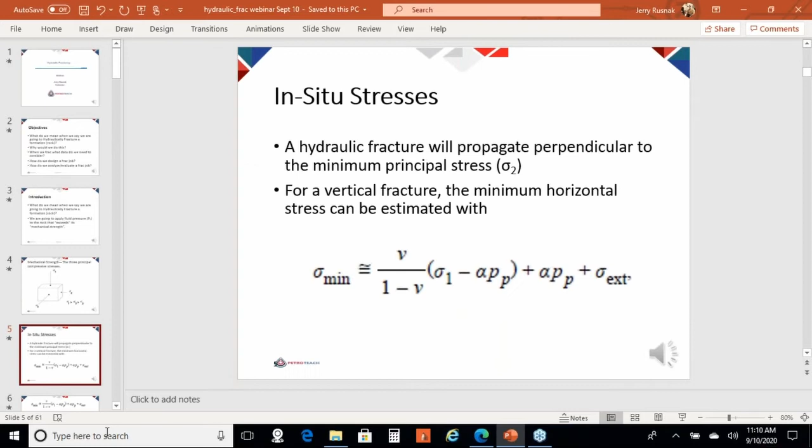Not sure what, can you hear me now? Yes, yes, now it's okay. Please start from your first slide because the audience couldn't hear you. Okay, let me go back. Let me figure out how to go back here. Let me get out of this. I can't, hang on just a second.

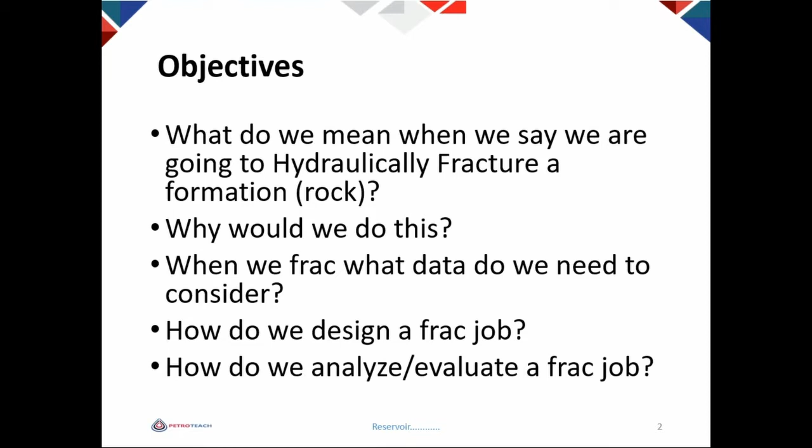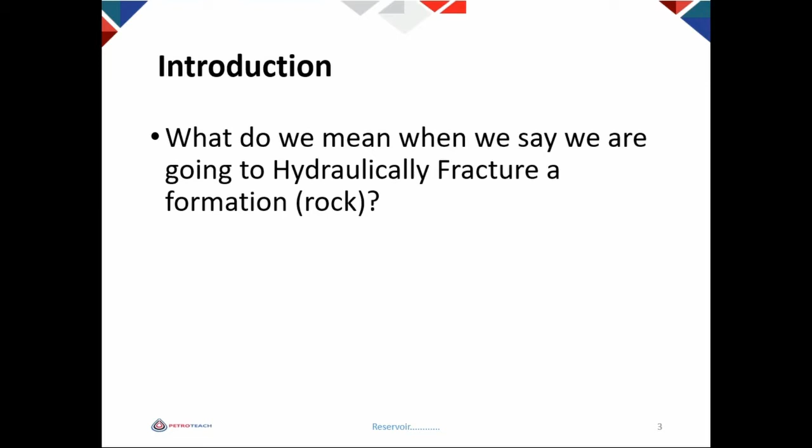So to start out, let's answer the question: what do we mean when we say we are going to hydraulically fracture a formation or a rock? We mean we are going to apply fluid pressure to the rock that exceeds its mechanical strength.

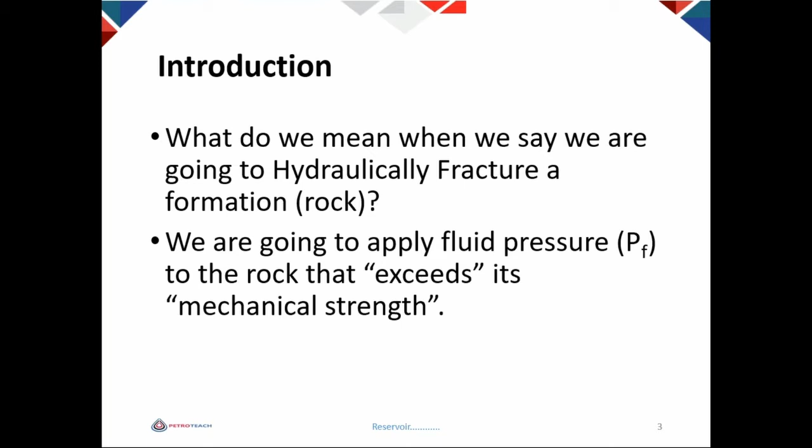When we look at the mechanical strength of a rock, we usually look at the three principal compressive stresses: sigma 1, sigma 3, and sigma 2. Sigma 1, we usually call the overburden or vertical stress, and it is normally the largest stress. Sigma 3 and sigma 2 are the resulting horizontal compressive stresses, where sigma 3 would be the maximum horizontal compressive stress, and sigma 2 would be the minimum horizontal compressive stress. So sigma 1 is larger than sigma 3, which is larger than sigma 2.

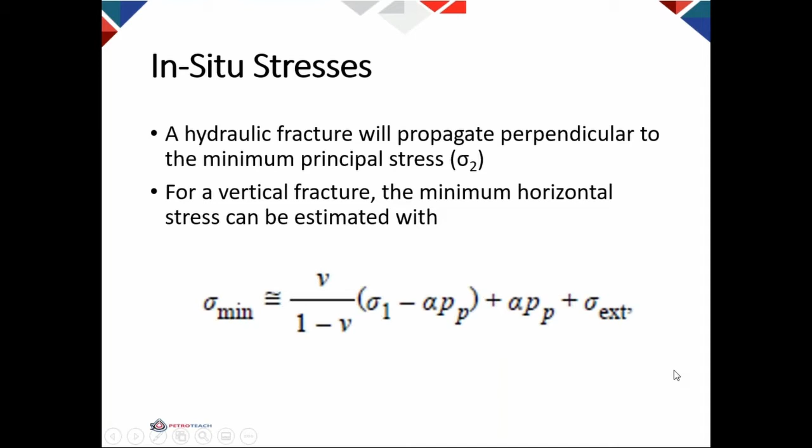Now, if we look a little closer at these in situ or local stresses, we know from experience that a hydraulic fracture will propagate perpendicular to the minimum principal stress, which was sigma 2 in the previous diagram. And for a vertical fracture, the minimum horizontal stress can be estimated with this formula: the minimum horizontal stress is approximately equal to Poisson's ratio divided by 1 minus Poisson's ratio times the quantity sigma 1, which is the overburden pressure, minus Biot's ratio, alpha, times the pore pressure, plus Biot's ratio times the pore pressure, plus sigma external, which accounts for any external stresses, for instance, tectonic stresses.

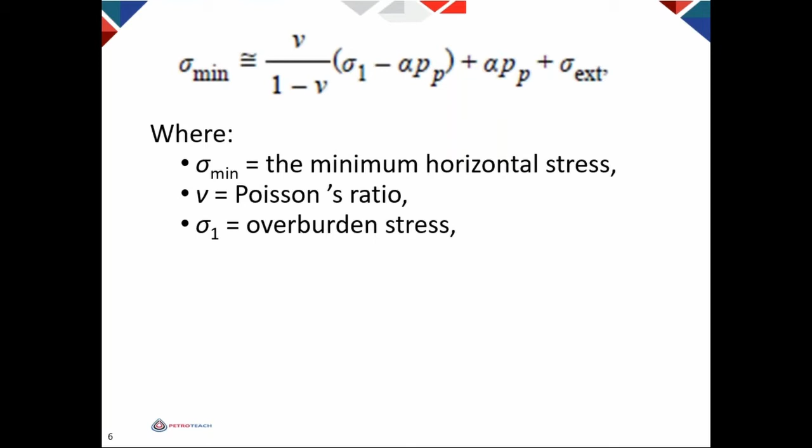So what else can we learn from the formula? Sigma min is our minimum horizontal stress. Nu is Poisson's ratio, and we can tell by looking at the formula that the larger Poisson's ratio is, the higher will be the minimum stress. Sigma 1 is the overburden stress, and again, the larger the overburden stress, which often means the deeper the well, the higher the minimum stress.

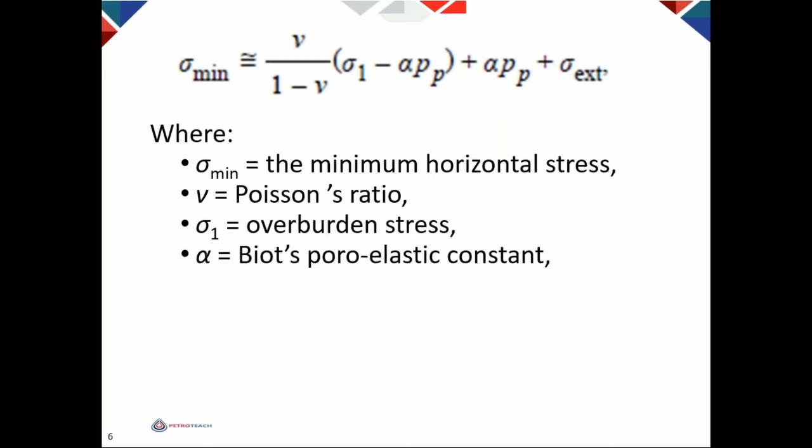Alpha is Biot's poroelastic constant, and it is tied in with the pore pressure, but in general, as the Biot's poroelastic constant increases, the minimum stress increases. Again, the reservoir fluid pressure or pore pressure tied in with Biot's constant shows that the higher the pore pressure or reservoir pressure, the higher the minimum stress. And if we have any external or tectonic stresses, they will again add to and increase the minimum stress.

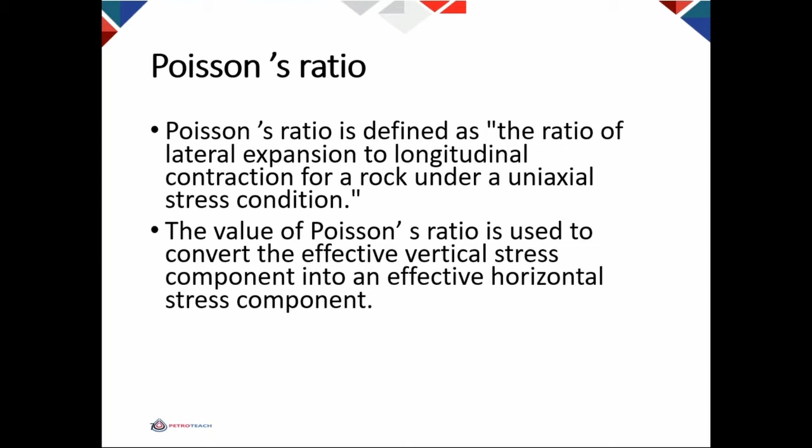So let's look at some of these variables. Let's start with Poisson's ratio. Poisson's ratio is defined as the ratio of lateral expansion to longitudinal contraction for a porous rock under uniaxial stress conditions. The value of Poisson's ratio is used to convert the effective vertical stress or overburden stress component into an effective horizontal stress component.

This value ranges from 0.15 to 0.35 for a sandstone and 0.28 to 0.43 for a shale, which, going back to our formula, would tell us that in general, the minimum horizontal stress for a sandstone is going to be less than that for a shale.

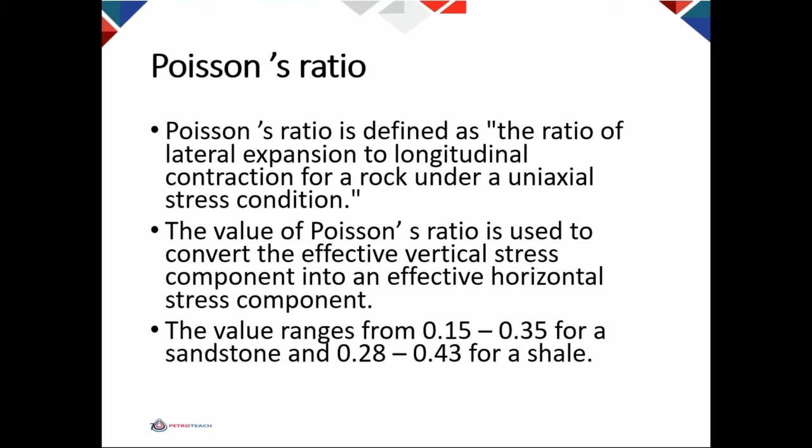Now let's look at Biot's poroelastic constant. It's defined as the ratio of the volume change of the fluid-filled porosity to the volume change of the rock when the fluid is free to move out of the rock. It ranges between 0 for a solid rock without any porosity and 1 for an extremely compliant and porous rock.

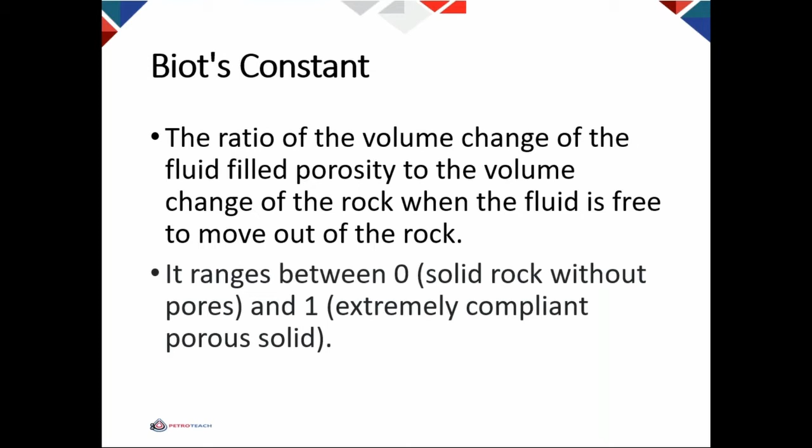Another modulus that we use when analyzing the mechanical strengths of rocks is Young's modulus. Young's modulus is defined as the ratio of stress to strain for uniaxial stress. This modulus of a material is a measure of the stiffness of the material. If the modulus is large, the material is stiff.

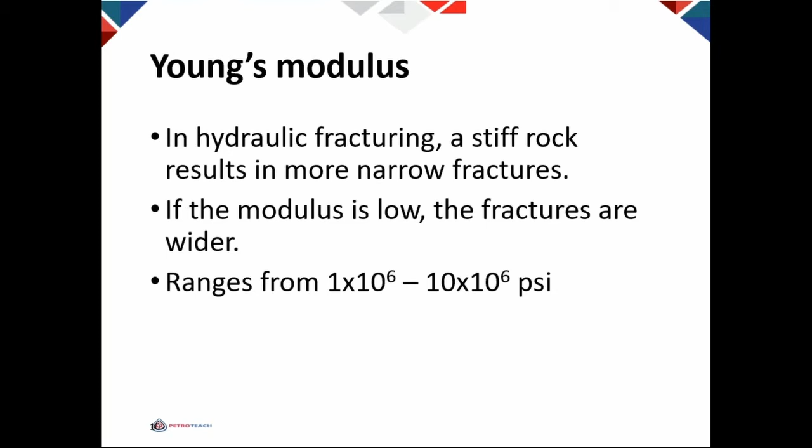In hydraulic fracturing, a stiff rock results in more narrow fractures. On the other hand, if the modulus is low, the fractures are wider, and the rock is more elastic. The ranges of Young's modulus for rocks ranges from 1 million to 10 million psi. Just for a reference, Young's modulus of steel is around 30 million psi.

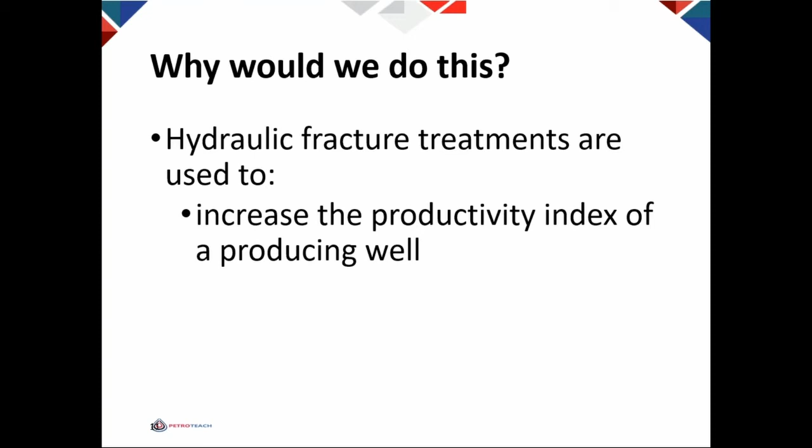So we've talked about what happens when we hydraulically fracture a rock and how the properties of the rock affect this. Now let's talk about why would we do this. Why would we hydraulically fracture a rock? Hydraulic fracture treatments are used to increase the productivity index in a producing well or the injectivity index of an injection well.

So what is the productivity index? Well, we commonly refer to it as J, and it's a measure of the flow rate we will get from the well depending upon the pressure drawdown we put on the well. So the productivity index is measured in stock tank barrels per day per PSI of drawdown.

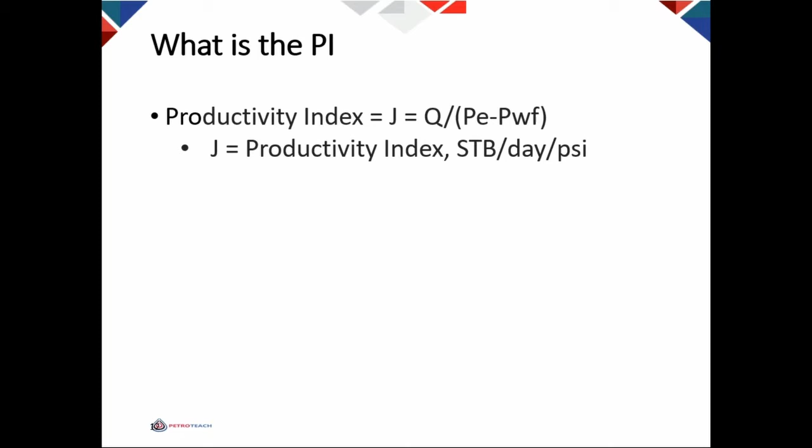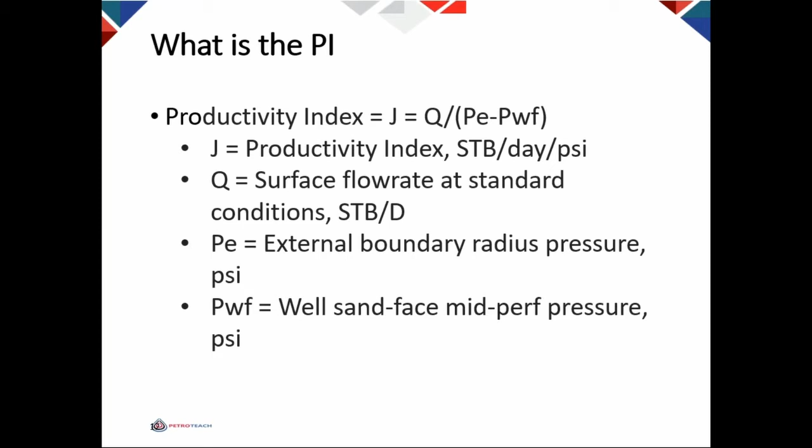Q is the surface flow rate at standard conditions, hence stock tank barrels per day. P sub E is the external boundary radius pressure in PSI, commonly referred to as the reservoir pressure. And P sub WF is the well sand face pressure at the mid-perfs, commonly referred to as the bottom hole flowing pressure in PSI.

So why would we frack a well? Hydraulic fracturing can increase the flow rate of oil and or gas from low permeability reservoirs. It can also increase the flow rate of oil and or gas from wells that have been damaged due to drilling, completion, or possibly workover operations.

It can connect the natural fractures and or cleats in a formation to the wellbore in a fractured formation. It can decrease the pressure drop around the well to minimize sand production. And it can enhance gravel packing and sand placement using a procedure we commonly refer to as a frac pack.

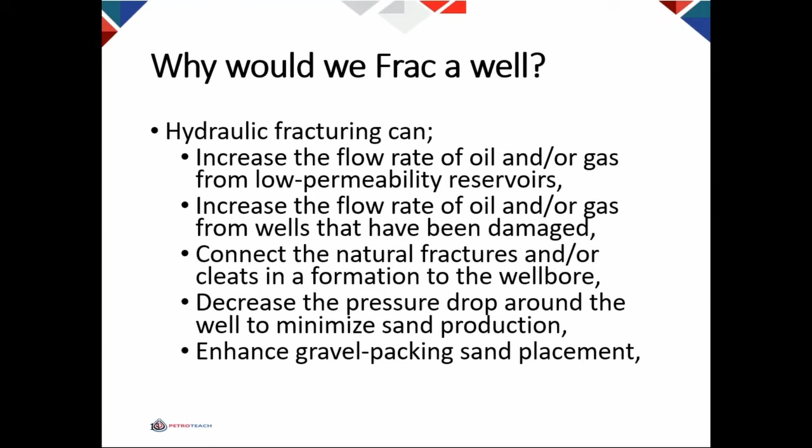So when we frac a well, what data do we need to consider? We need the data required to run both the fracture design model and the reservoir simulation model, and it can be divided into two groups: data that can be controlled by the engineer, and data that must be measured or estimated but cannot be controlled by the engineer.

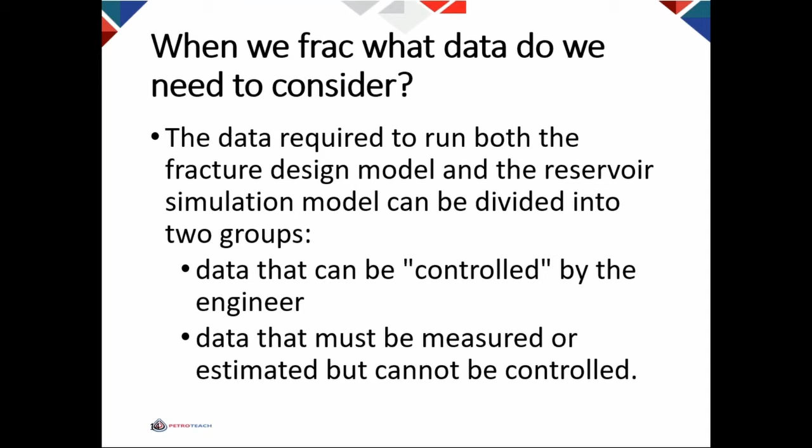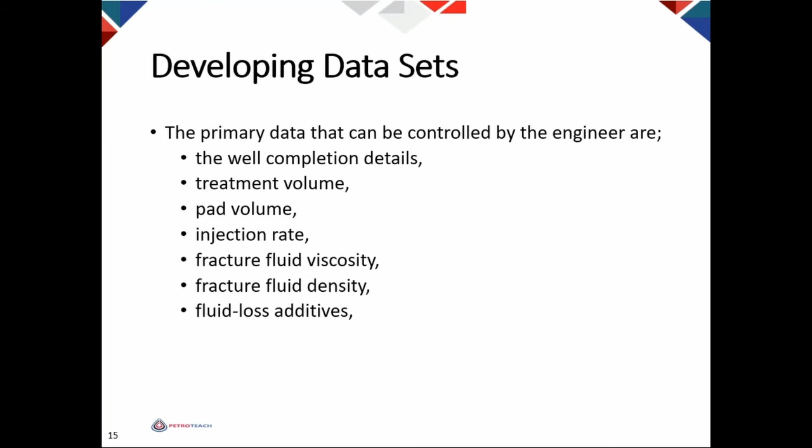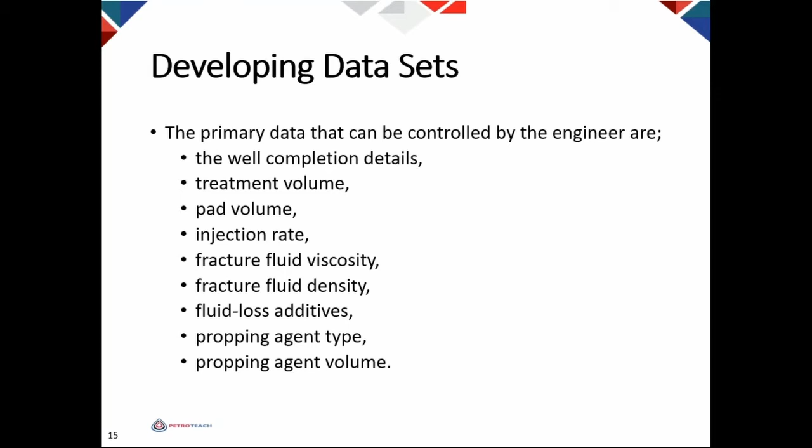So we have to develop these data sets. The primary data that can be controlled by the engineer include the well completion details, sometimes referred to as the wellbore schematic, the treatment volume we pump, the pad volume we pump, the injection rate we pump it at, the fracture fluid viscosity, the fracture fluid density, fluid-loss additives, and any other additives we add to the fracture fluid, the propping agent type, and the propping agent volume.

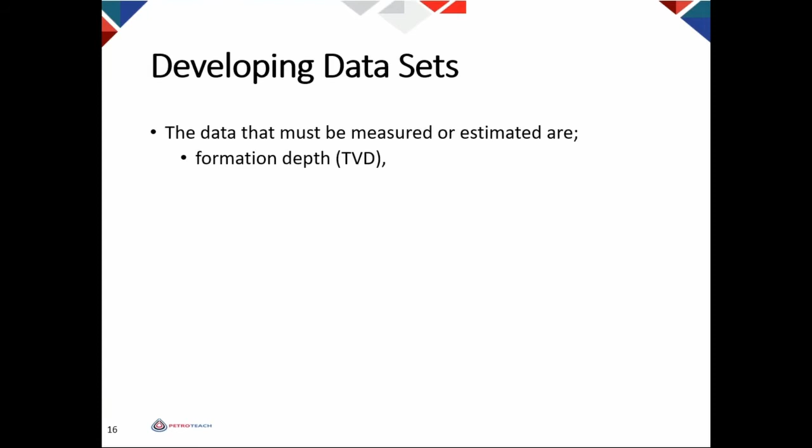The other data that must be measured or estimated includes the formation depth, which is sometimes the true vertical depth, the formation permeability, the in situ stresses in the pay zone, the in situ stresses in the surrounding layers, the formation modulus, the reservoir pressure, the formation porosity, the formation compressibility, and the reservoir thickness.

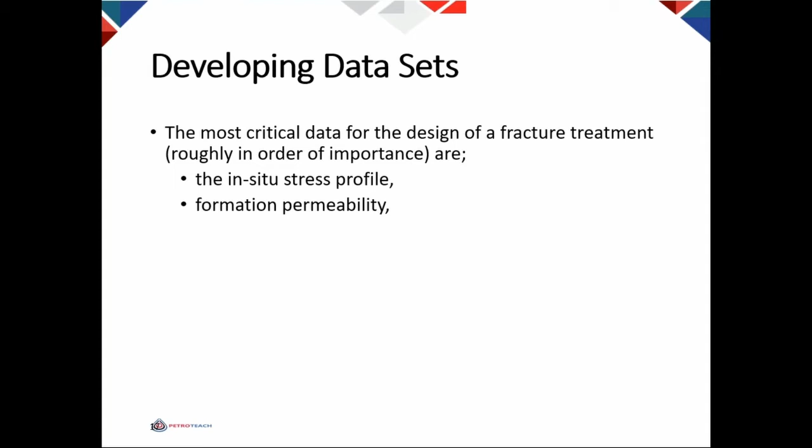If we look at all this data, the most critical data for the design of a fracture treatment, roughly in order of importance, are as follows: the in situ stress profile, the formation permeability, the fluid loss characteristics of the rock, the total fluid volume pumped during the frac job, the propping agent type and amount used, the pad volume, the fracture fluid viscosity, the injection rate, and the formation modulus.

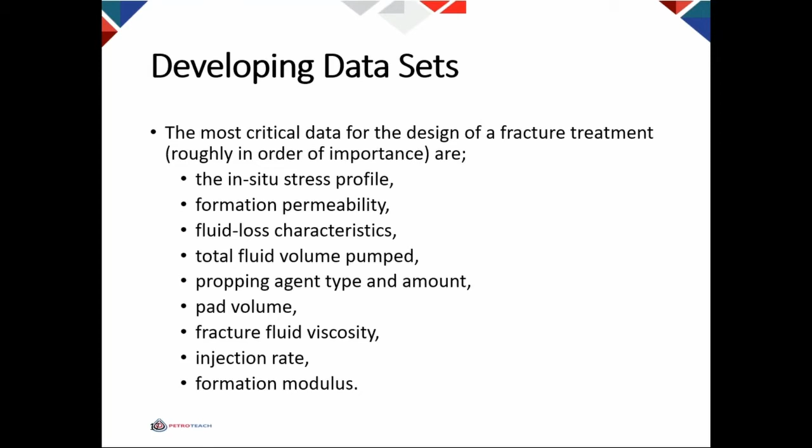Now, if we want to look at candidates or wells that are candidates for hydraulic fracture treatments, we can say that the best candidate wells have substantial reserves, but need to increase the productivity index in order to be economically successful.

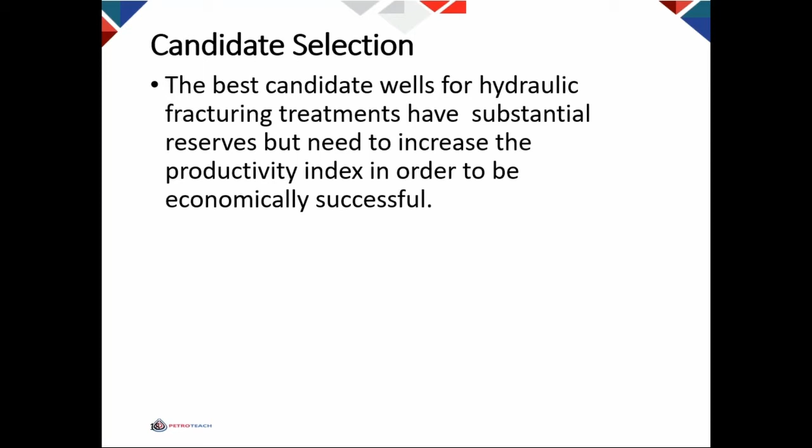On the other hand, reservoirs that are poor candidates for hydraulic fracturing are those with little and/or no oil or gas in place because they're thin reservoirs, or they have low reservoir pressure, or they have a small areal extent, which translates into a small reservoir volume.

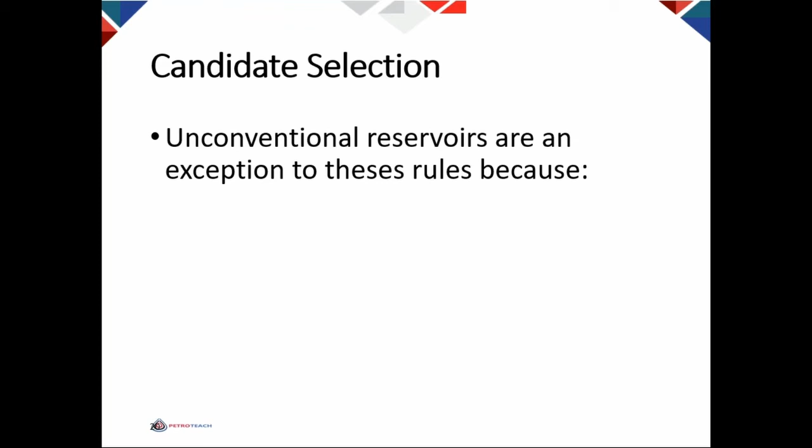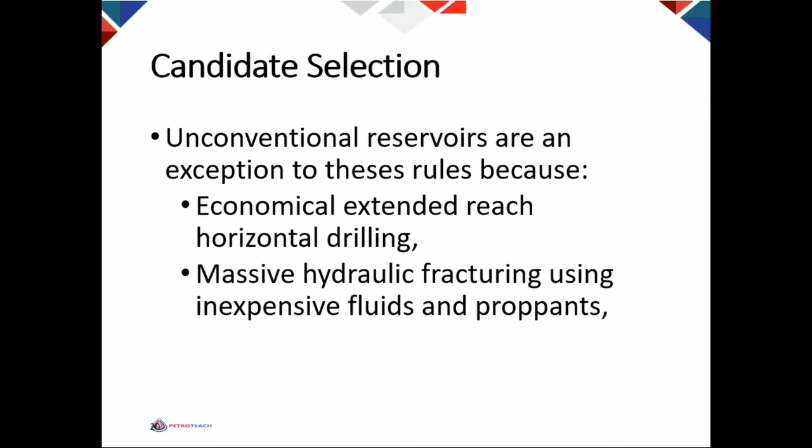Now, unconventional reservoirs, these so-called shale oil and gas reservoirs, are an exception to these rules because economically extended reach horizontal drilling has advanced and is now relatively inexpensive. Massive hydraulic fracture treatments using inexpensive fluids and inexpensive proppants work well on these unconventional reservoirs.

And we have made many advances in rigless completion systems, including wireline and coil tubing and ported frac sleeves that can be operated downhole from the surface.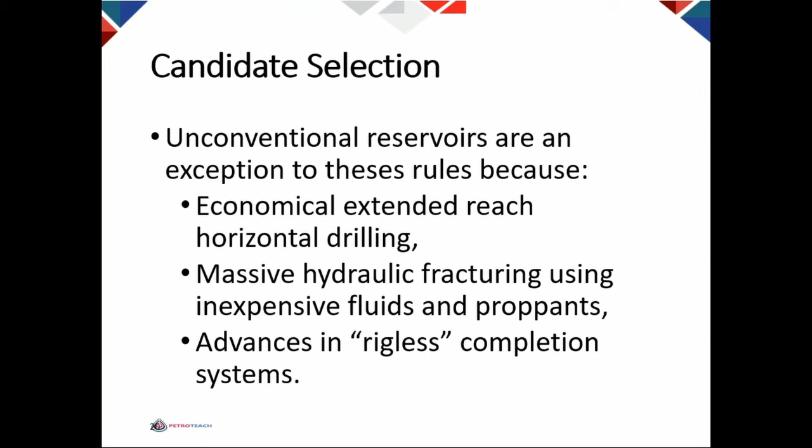So next, how do we design a frac job? We need to choose fracturing fluids. We need to choose proppants. And we need to choose pumping equipment.

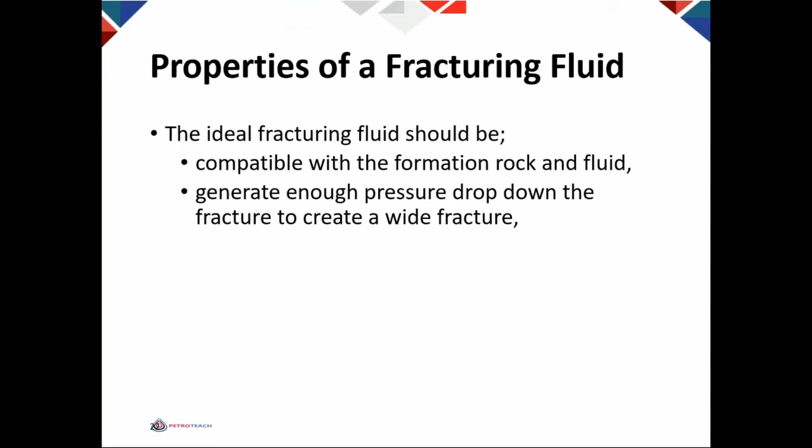Let's look at the properties of the fracturing fluid. The ideal fracturing fluid should be compatible with the formation rock and fluids, generate enough pressure drop down the fracture to create a wide fracture, and be able to transport the propping agent into the fracture.

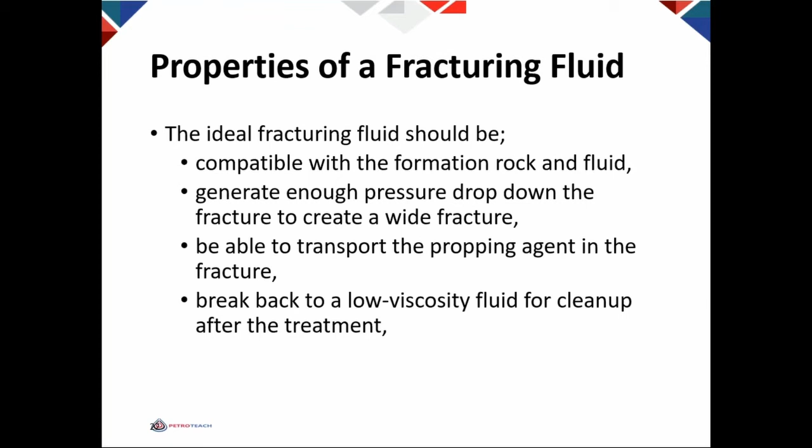The fracturing fluid should break back to a low viscosity fluid for cleanup after the treatment. That's to say that the fracturing fluid will have a high viscosity while pumping into the formation, but after the pumping stops, a breaker in the gel will allow the viscosity to break back down so that it will flow back easier. And it must be cost effective.

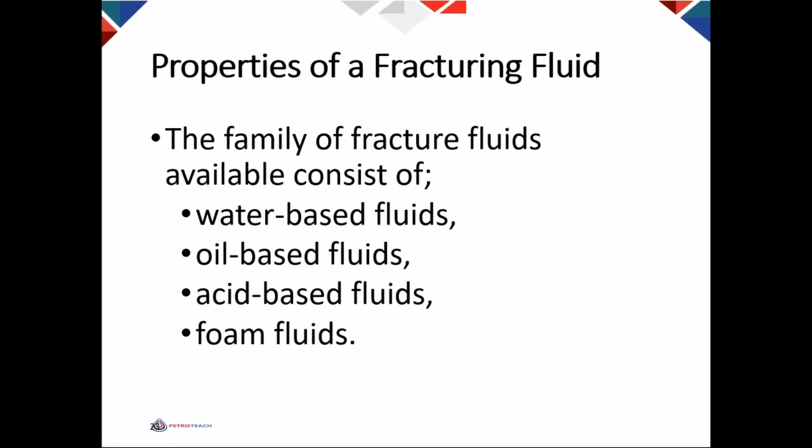The family of fracture fluids readily available consist of water-based fluids, oil-based fluids, acid-based fluids, and foam fluids. The foam fluids generally contain some gas in them, either nitrogen or carbon dioxide. Now, just like with drilling, completion, and workover fluids, there are a number of additives that can be added to the fracture fluid depending upon what function needs to be performed.

Anything from a biocide that will kill bacteria, to a fluid loss additive that will improve fluid loss efficiency, or a friction reducer that reduces friction. There are many different types of additives that we can use in our fracture fluid.

So now let's talk about the propping agents and how they affect the fracture conductivity, or the permeability of the fracture itself. Propping agents are required to prop open the fracture once the pumps have been shut down and the fracture begins to close.

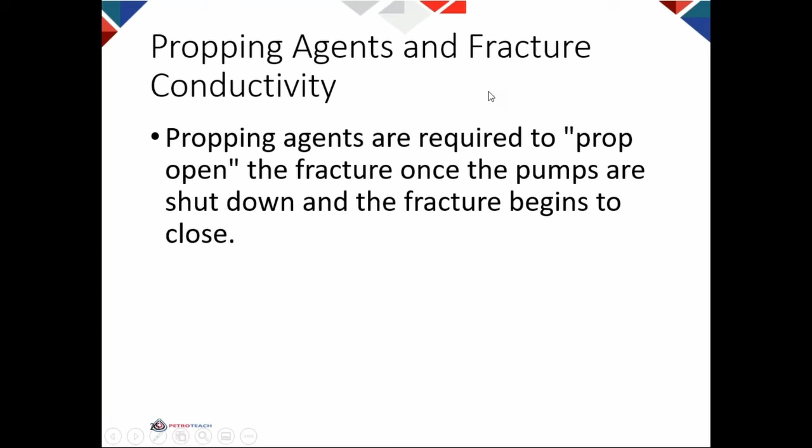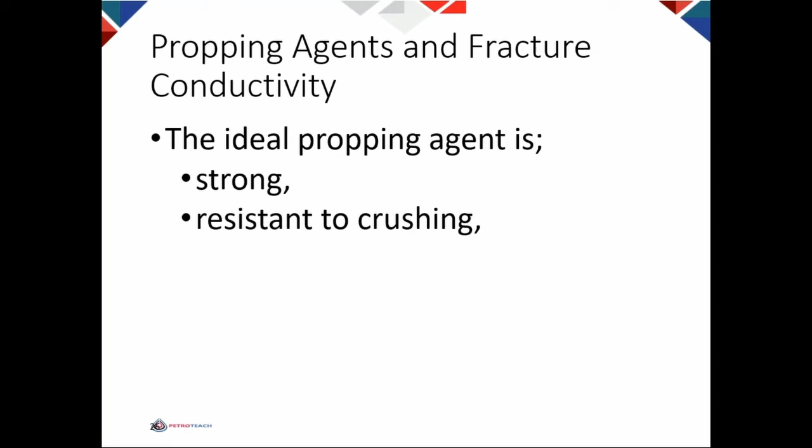The ideal propping agent is strong, resistant to crushing, resistant to corrosion, has a low density, and is readily available at a low cost.

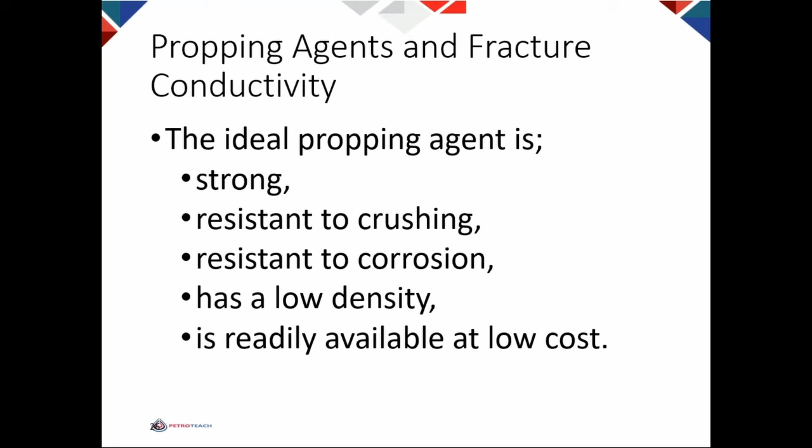The products that best meet these desired traits are silica sand, resin-coated sand, and ceramic proppants, which are man-made.

And for silica sand, Jordan sand being a common one, if you apply too much effective stress to it, it's going to crush and your fracture conductivity is going to drastically fall.

Whereas if you use one of the man-made ceramic proppants, it is much stronger and the effective stress has a much lower effect on the fracture conductivity. So in general, we use the sands for shallower wells, and we use the ceramic proppants for deeper wells. Of course, the sand is much cheaper than the ceramic.

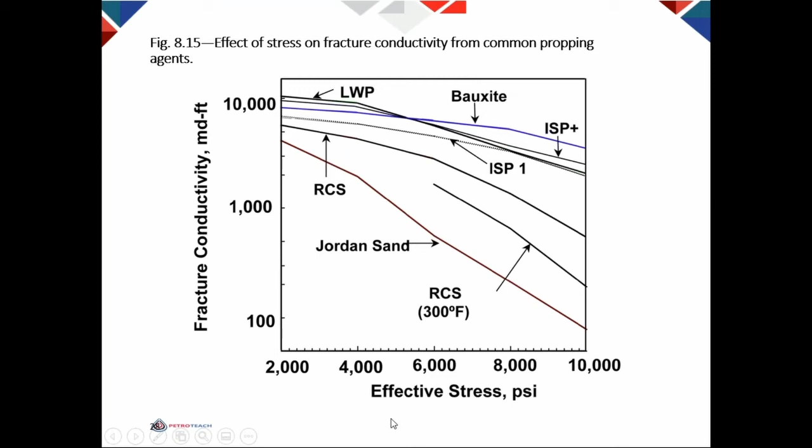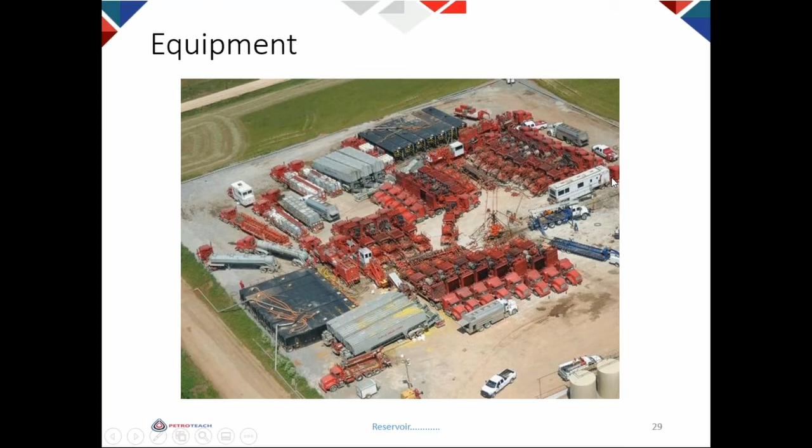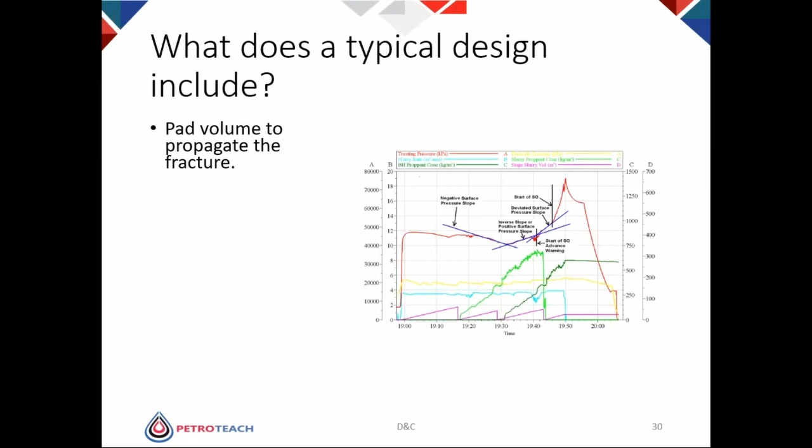So what does a typical frac design include? You have a pad volume that is used to propagate the fracture.

You have a slurry volume, which is the blended fluid and prop, and it is placed behind the pad, or in the next stage, to hold open the fracture.

And you need a displacement volume to clear the slurry out of the wellbore down to the top of the formation being fractured.

If we look at a typical job design and the many different things we are monitoring and recording during the job, we can see that we have the treating pressure here in red, which is your pump pressure. We have the slurry rate, in blue, which is the rate at which we are pumping the job.

We have the bottom hole proppant concentration in this dark green, and you can see that the bottom hole proppant concentration lags in time behind the surface proppant concentration, which is in the lighter green.

And if we are using a compressible frac fluid, or one that has some gas in it, then the bottom hole concentration will be much different, or can be much different, than the surface concentration.

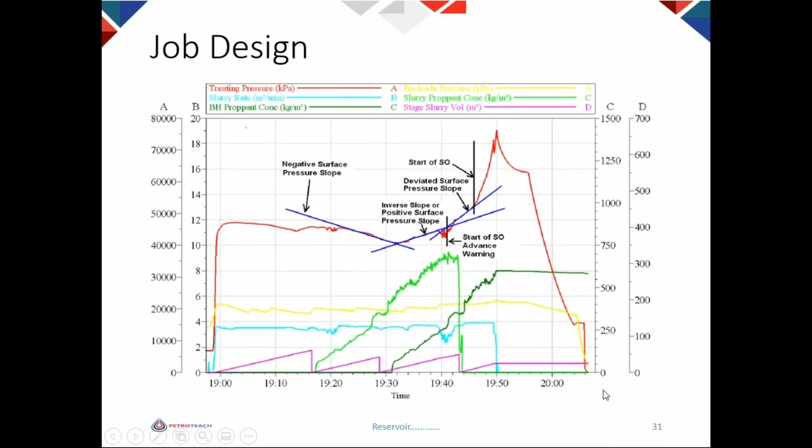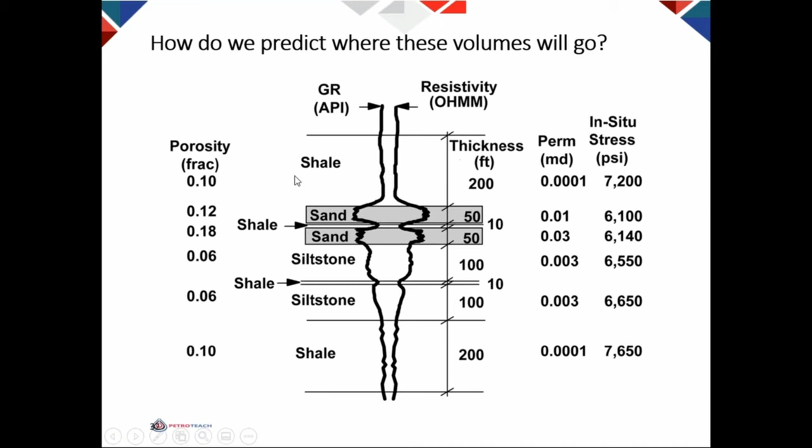So how do we predict where these volumes will go? Well, we build a model, and this model includes the sand, typically the zone where we are going to perforate, and it will be surrounded by other formations and eventually by some shales that will bound these formations. And we assign these many values that we've talked about before to each layer in this model.

So we develop our data sets, and then using our model, we design a fracture treatment. Most engineers now use what is called a pseudo three-dimensional, or P3D, model.

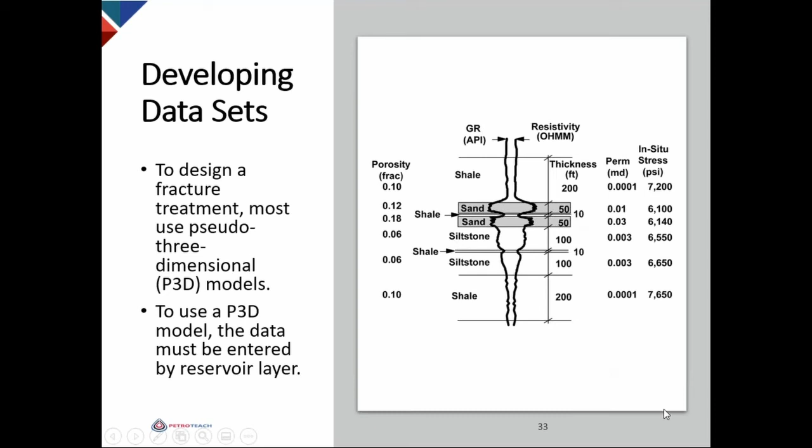And to use the P3D model, as we say, the data must be entered layer by layer to build our reservoir model.

When developing these data sets, we know that the fracture treatment would be started in the sandstone reservoir, and the fracture will typically grow up and down until a barrier is reached to prevent further vertical fracture growth. In many cases, you will have a thick marine shale that will be the boundaries to your vertical fracture growth.

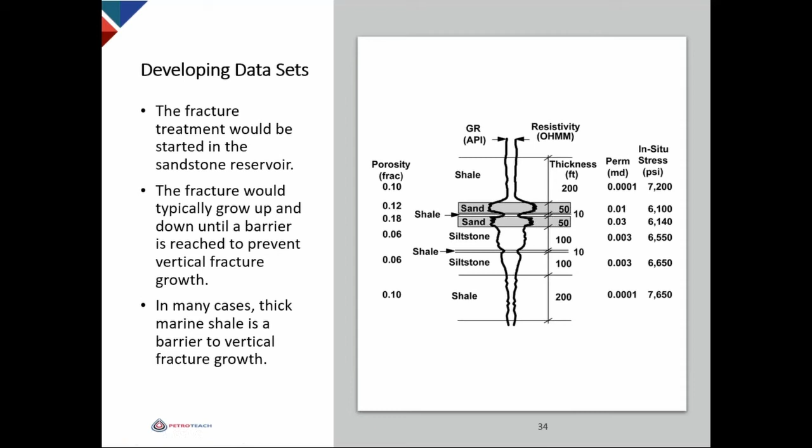So how do we optimize this fracture design process? We use a reservoir simulator, focused on the cumulative production versus time, and a hydraulic or hydrofrac simulator, which mirrors the data with the reservoir simulator, but is primarily focused on treatment volume versus fracture length.

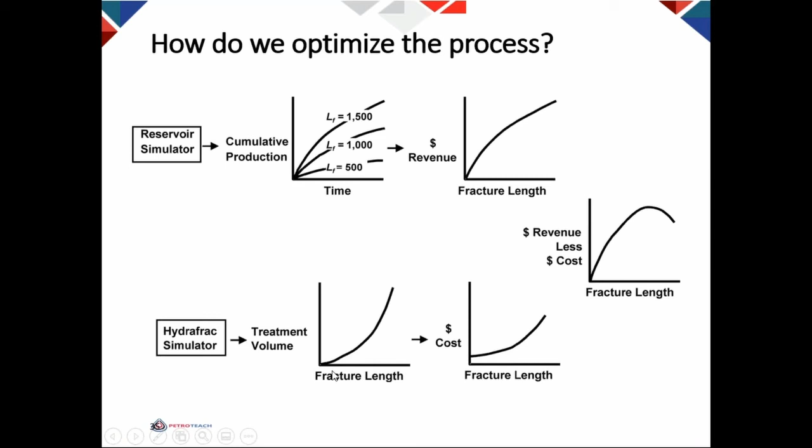Now we know the method used to optimize the size of the fracture treatment, and it clearly shows the following: as the propped length of the fracture increases, the cumulative production will increase, and therefore the revenue from the hydrocarbon sales will increase.

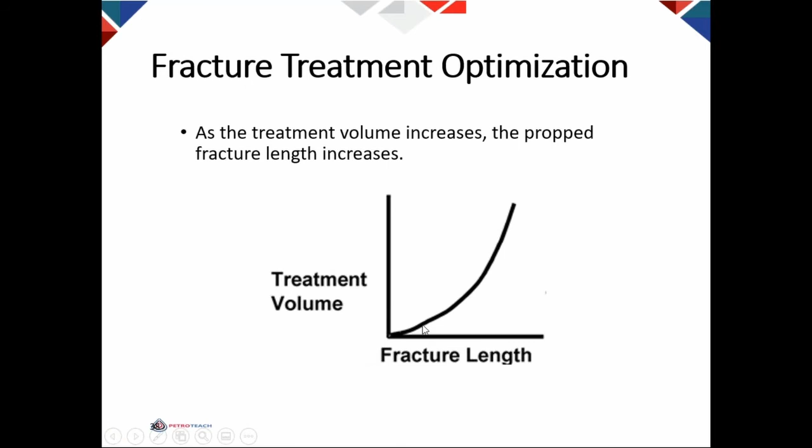We know that as the fracture length increases, the incremental benefit, or the amount of revenue generated per foot of additional propped fracture length, decreases. We know that as the treatment volume increases, the propped fracture length increases. We know that as the fracture length increases, the incremental cost, or the cost per foot of additional propped fracture length, increases.

If we combine all of this information, we find that when the incremental cost of the treatment is compared with the incremental benefit of increasing the treatment volume, an optimum propped fracture length can be found in almost every situation.

Okay, so we've talked about what a fracture is, why we would frac, and how to design a frac. Now let's talk about how we actually pump a job.

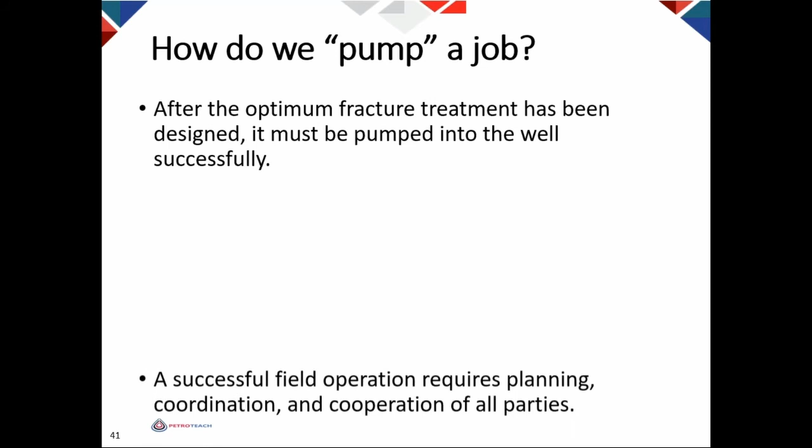After the optimum fracture treatment has been designed, it must be pumped into the well successfully. A successful field operation requires planning, coordination, and cooperation of all parties involved. Treatment supervision and the use of quality control measures will improve the successful application of the hydraulic fracturing.

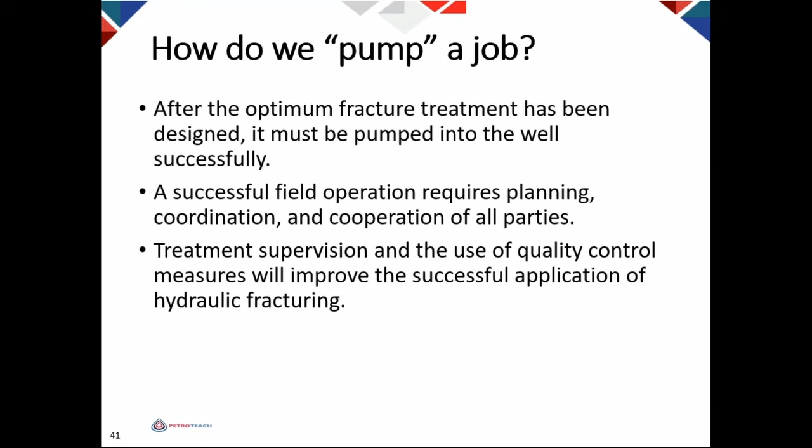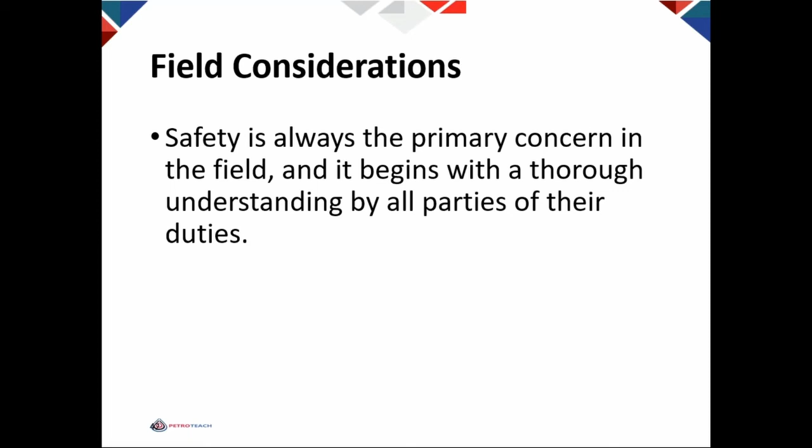Safety is always the primary concern in the field, and it begins with a thorough understanding by all parties of what their duties are. A job safety and environmental analysis performed prior to the job is the best means of accomplishing this.

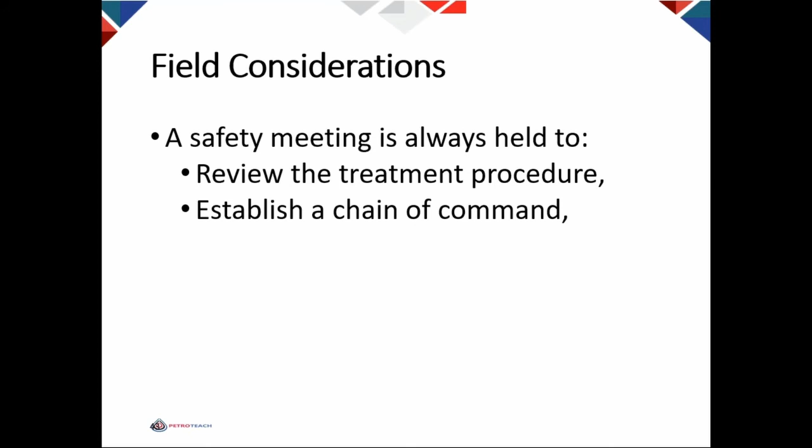A safety meeting is always held to review the treatment procedure, establish a chain of command, ensure everyone knows his or her job responsibilities for the day, and establish a plan for emergencies.

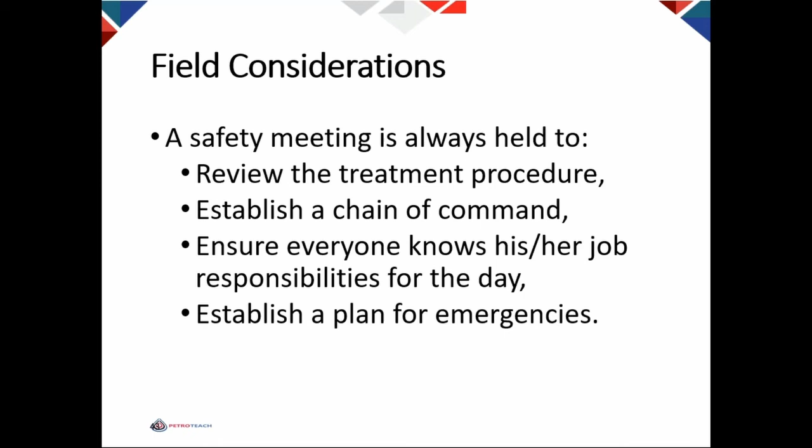Screen out is one of the more common emergencies that occurs during a frac job. Screen out refers to a condition when continued injection of fluid inside the fracture requires pressures in excess of the safe limitations of the wellbore or the wellhead equipment.

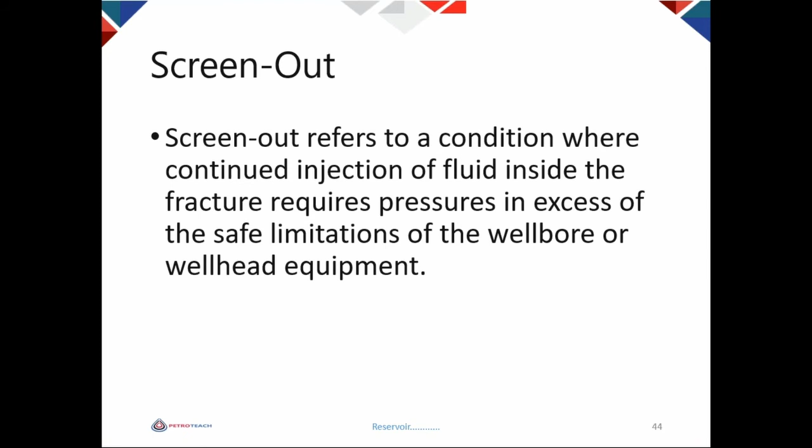This point is where we start to predict or suspect that we are going to have a screen out. If this pressure rises suddenly, you have to react quickly to this emergency and sharply decrease, and finally shut down, your pump rate, allowing this pressure to bleed off or leak off into the formation. That's a common emergency procedure you have to plan for when pumping a frac job.

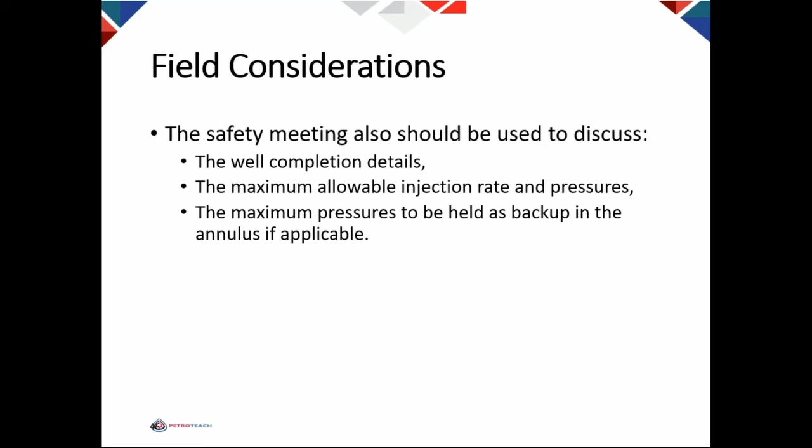The safety meeting should also discuss the well completion details, the maximum allowable injection rate and pressures, and the maximum pressure to be held as a backup on the annulus if applicable. All casing, tubing, wellheads, valves, and weak links such as liner tops should be tested thoroughly before starting the fracture treatment.

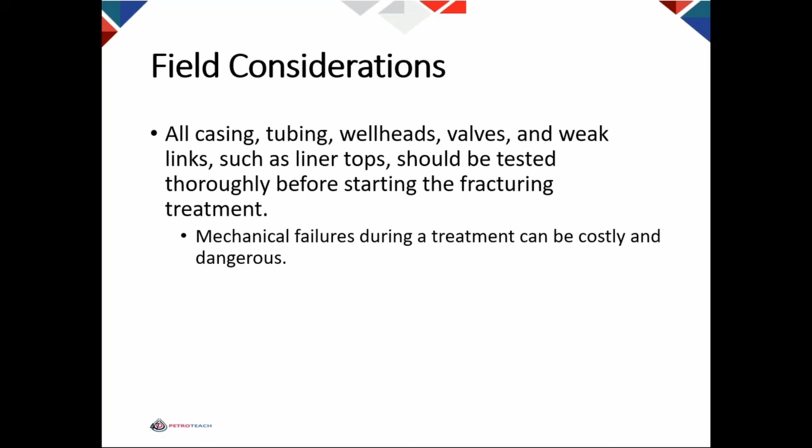Mechanical failures during a treatment can be costly and dangerous. All mechanical problems should be discovered during the testing and repaired before pumping the fracture treatment.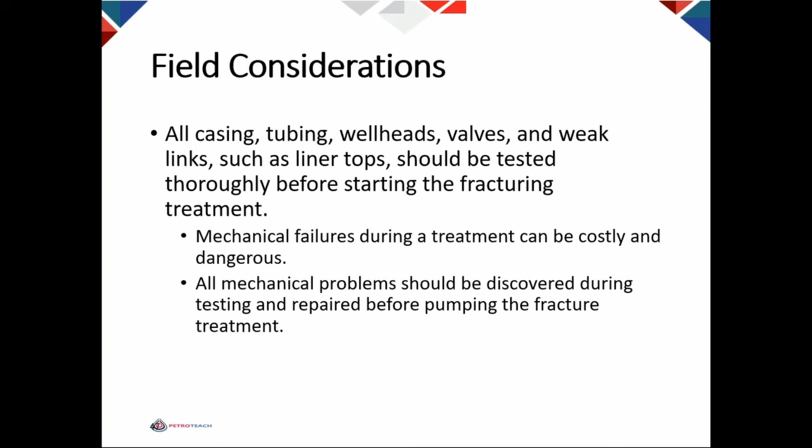Before pumping the treatment, the engineer in charge should conduct a detailed inventory of all the equipment and materials on location. This inventory should be compared with the design and the prognosis. This is your quality control and quality assurance. Then after the treatment has been concluded, another inventory of all the materials left on location should be conducted.

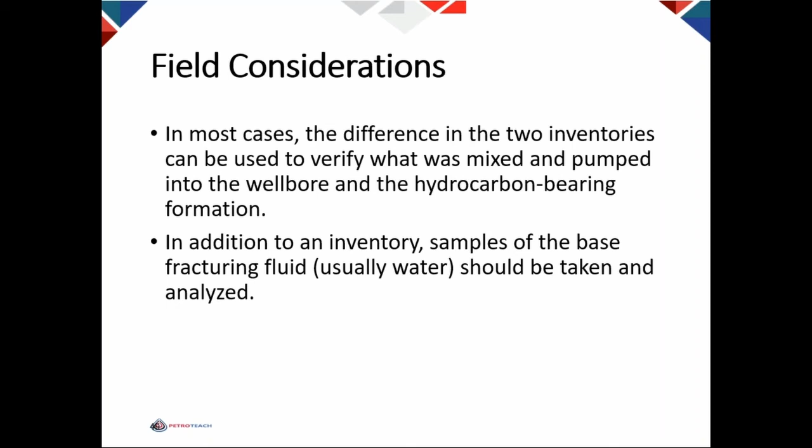In most cases, the difference in the two inventories can be used to verify what was mixed and pumped into the wellbore and the hydrocarbon-bearing formation. In addition to the inventory, another quality control is to take samples of the base fracturing fluid, which is usually water, and have it analyzed to make sure it had the properties that you were expecting.

So now, last but not least, how do we analyze or evaluate our frac job? We have two methods: a direct far field technique, which means we're actually going to measure the job while we pump it, and an indirect fracturing modeling technique where we use the data after the job.

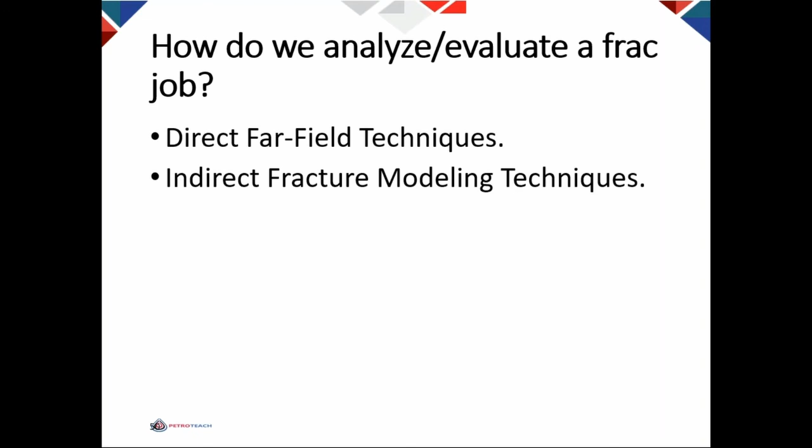One of the most common direct far field techniques uses acoustic or seismic energy or data that is measured while the job is being pumped. These data collections can be done either at the surface or, more commonly, downhole in a wellbore nearby the wellbore that's being fracked.

You can take this acoustic or seismic data and use fracture modeling software, which will incorporate the events, magnitude, and geomechanical analysis to help determine the fracture size and orientation. It can also estimate the stimulated rock volume. It incorporates the magnitude, the rock properties, and the fluid properties to map the hydraulic fractures that are created, and it can be used to estimate the propped half length, or the length of the fracture.

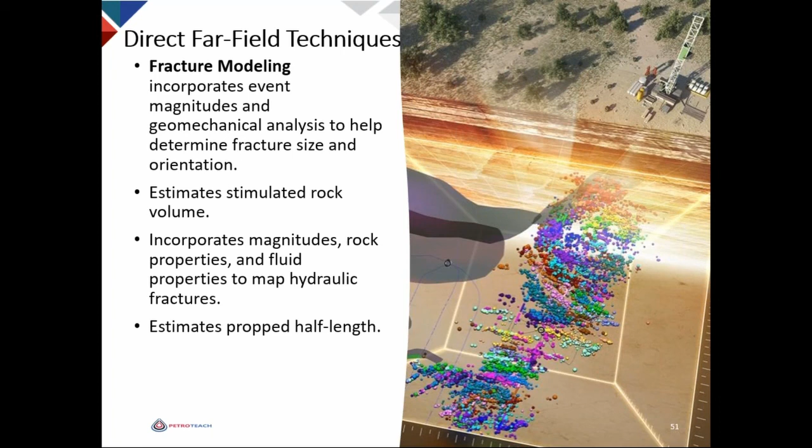Because the fracture treatment data and the post-fracture production data are normally available on every well, these indirect fracture diagnostic techniques are most widely used compared to the direct fracture techniques, and they are used to determine the shape and dimensions of both the created and the propped hydraulic fracture.

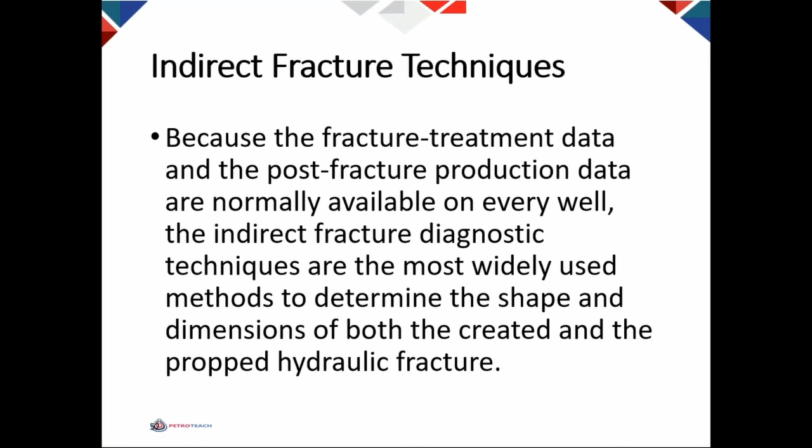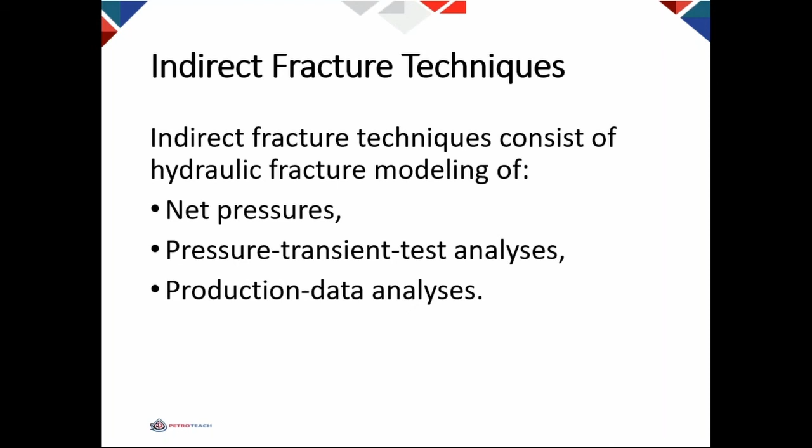Indirect fracture techniques consist of hydraulic fracture modeling of net pressures, pressure transient test analysis, and production data analysis. The fracture treatment data can be analyzed with the pseudo 3D fracture propagation model to determine the shape and dimensions of the created fracture. The P3D model is used to history match the fracturing data, such as the injection rates and the injection pressures.

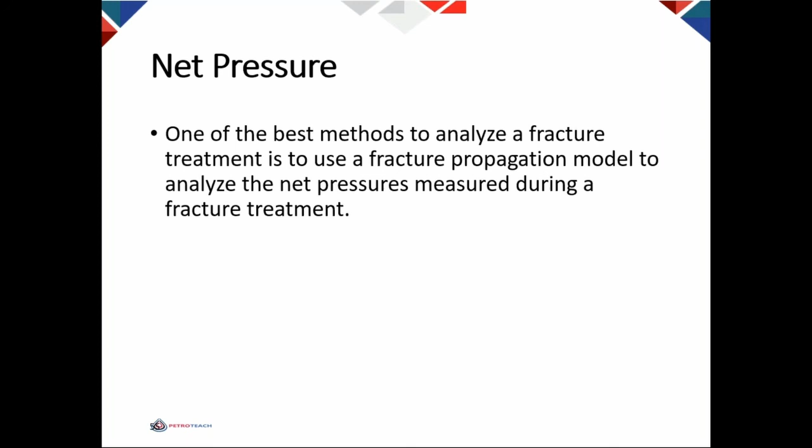Let's talk about net pressure, because net pressure is one of the best indirect methods to analyze a fracture treatment. It is used as a fracture propagation model to analyze the net pressure measured during a fracture treatment. In many formations, the pressure drop down the fracture is dominated by the pressure increases near the tip of the fracture as propagation occurs.

The net pressure profile controls both the fracture height and fracture width distribution along the fracture length. You will often have a near wellbore pressure drop due to the completion, and it has to be accounted for. But remember, the net pressure is a bottom hole pressure, so it is the surface pump pressure plus the hydrostatic pressure minus the friction pressure down the pipe.

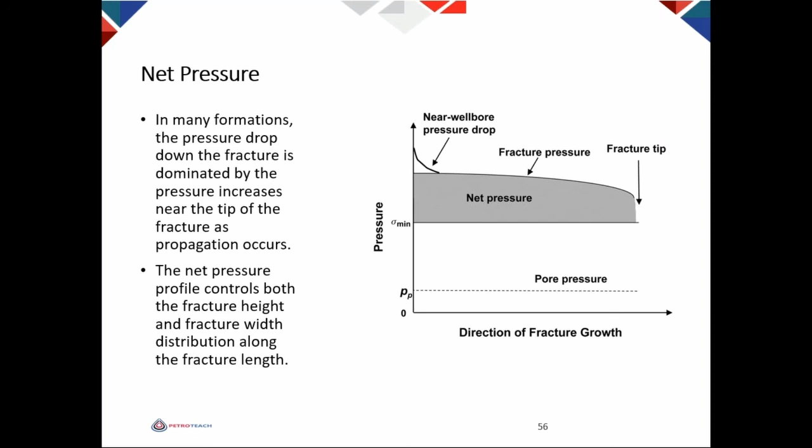If we take this data and put it into our P3D model, we will get a profile or a picture of the fracture height, the fracture length, and the fracture width using this net pressure analysis.

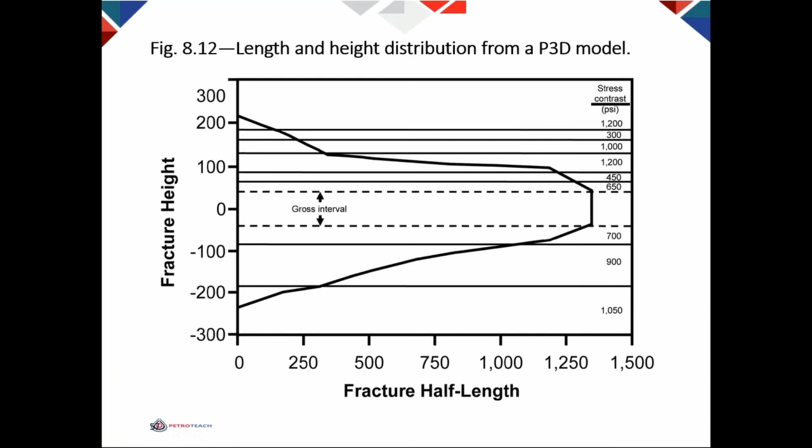Now, another indirect method is called a post-fracture well test analysis. It is used to compute an estimate of the propped fracture length, the fracture conductivity, and the drainage area of the formation using well test data.

Since it is well test data, it's important to keep good records of the flow rates of oil, gas, and water, as well as the flowing pressures, preferably bottom hole pressures, after the fracture treatment. And if possible, a pressure buildup test should be run after the well cleans up following the fracture treatment.

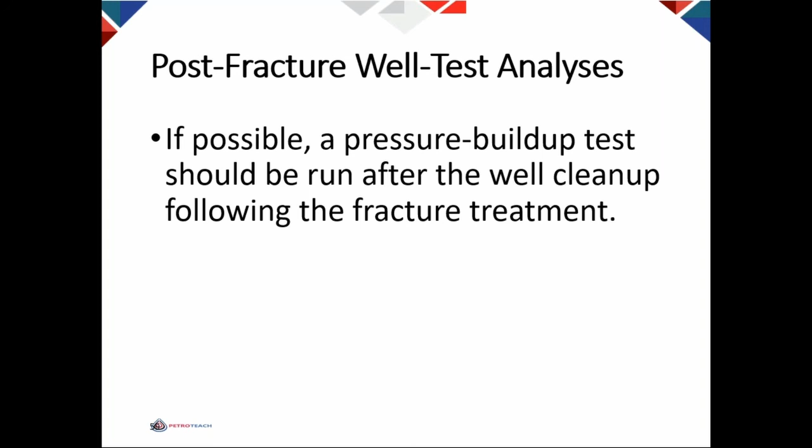So this concludes the presentation portion of today's webinar, and in a moment we will move to the question and answer session.